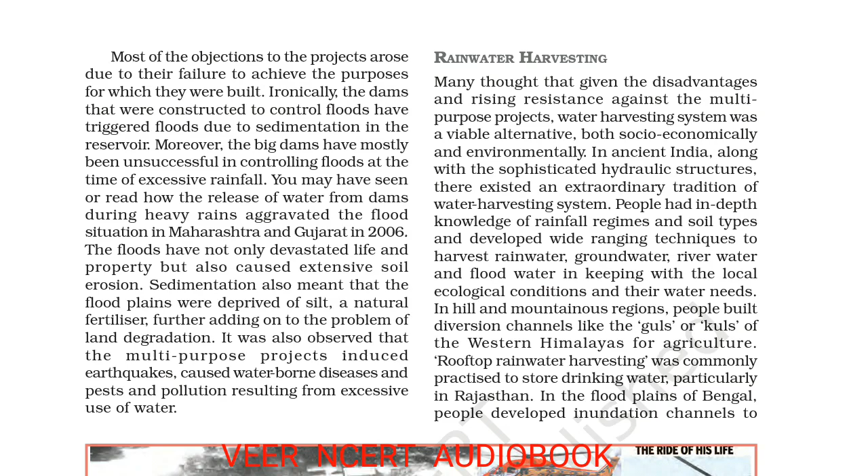Rainwater harvesting. Many thought that given the disadvantages and rising resistance against the multipurpose projects, water harvesting system was a viable alternative, both socio-economically and environmentally.

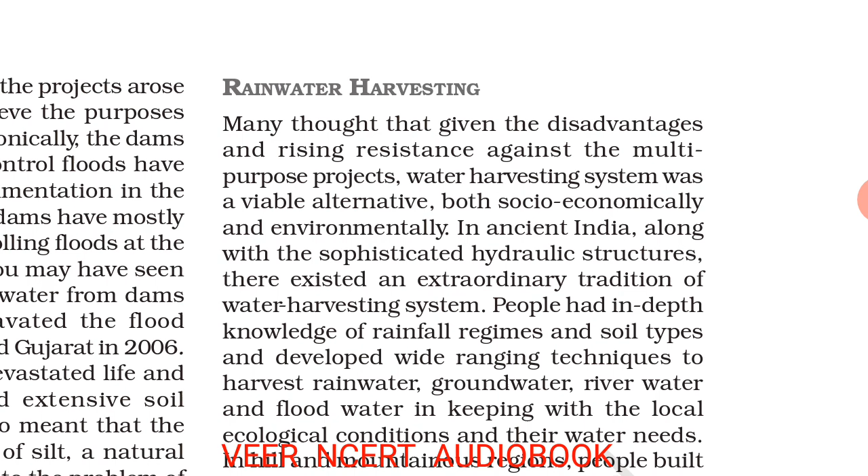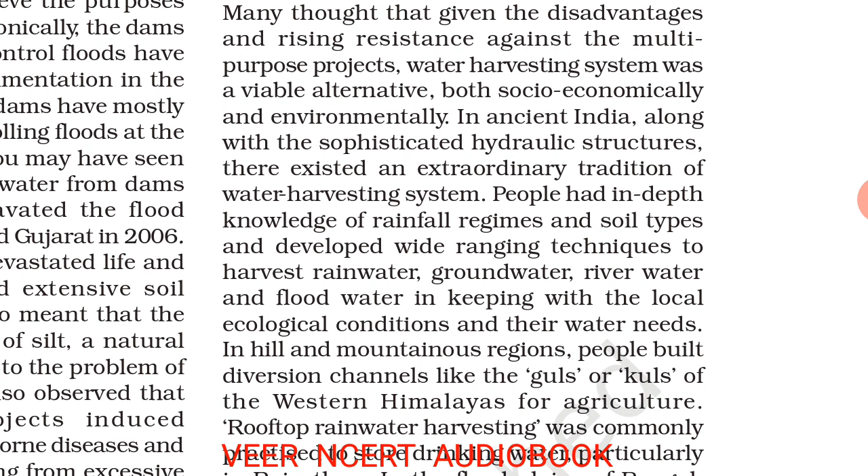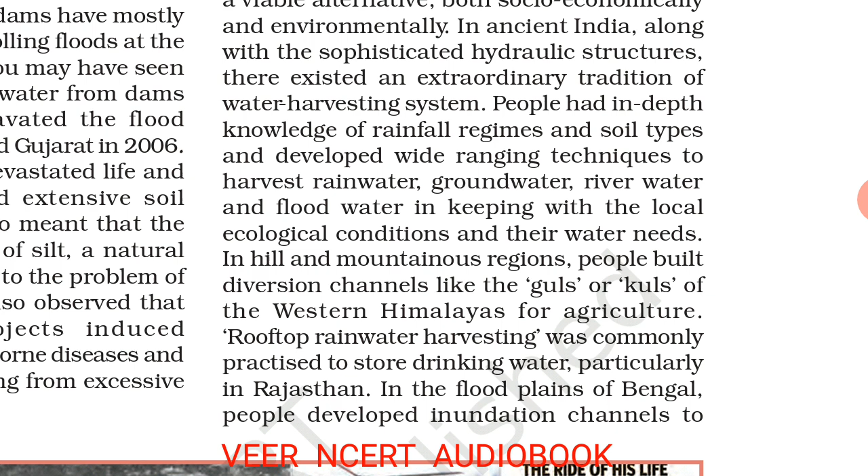In ancient India, along with the sophisticated hydraulic structures, there existed an extraordinary tradition of water harvesting system. People had in-depth knowledge of rainfall regimes and soil types and developed wide-ranging techniques to harvest rainwater, groundwater, river water, and floodwater in keeping with the local ecological conditions and their water needs.

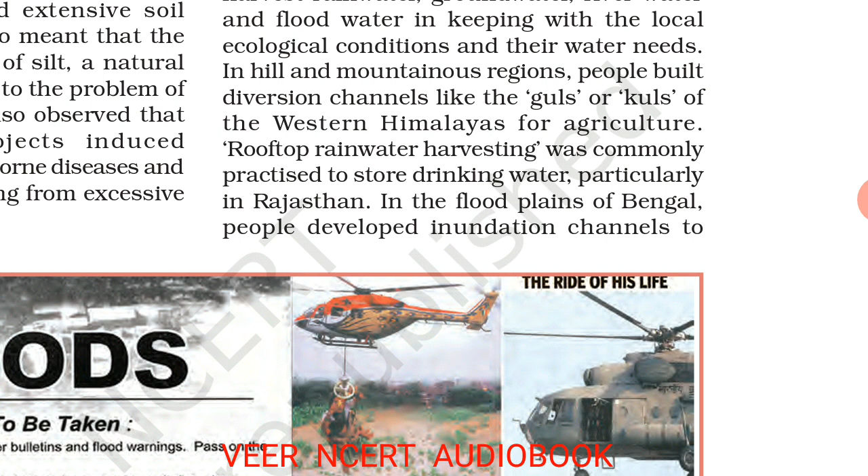In hill and mountainous regions, people built diversion channels like the guls or kuls of the western Himalayas for agriculture. Rooftop rainwater harvesting was commonly practiced to store drinking water, particularly in Rajasthan. In the floodplains of Bengal, people developed inundation channels to irrigate their fields.

In arid and semi-arid regions, agricultural fields were converted into rain-fed storage structures that allowed the waters to stand and moisten the soil, like the khadins in Jaisalmer and johads in other parts of Rajasthan.

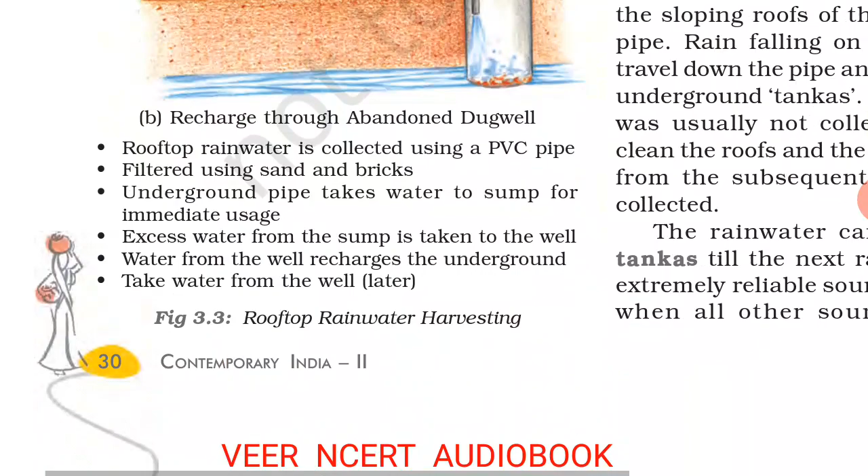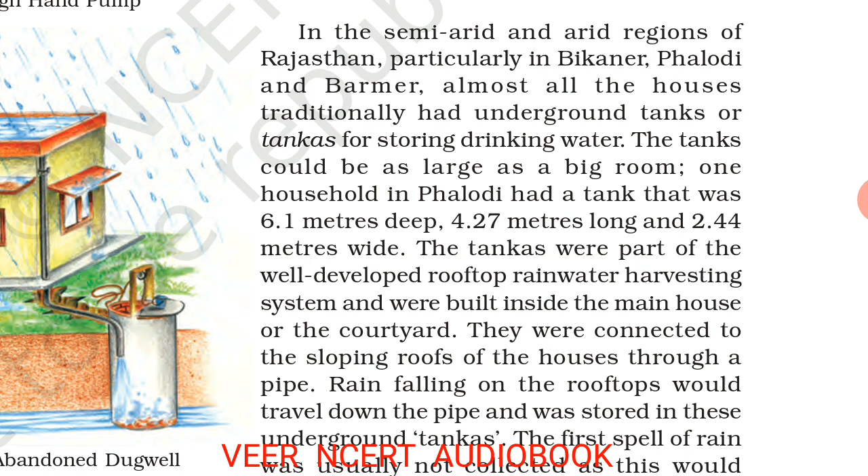In the semi-arid and arid regions of Rajasthan, particularly in Bikaner, Phalodi, and Barmer, almost all the houses traditionally had underground tanks or tankas for storing drinking water. The tanks could be as large as a big room. One household in Phalodi had a tank that was 6.1 meters deep, 4.27 meters long, and 2.44 meters wide.

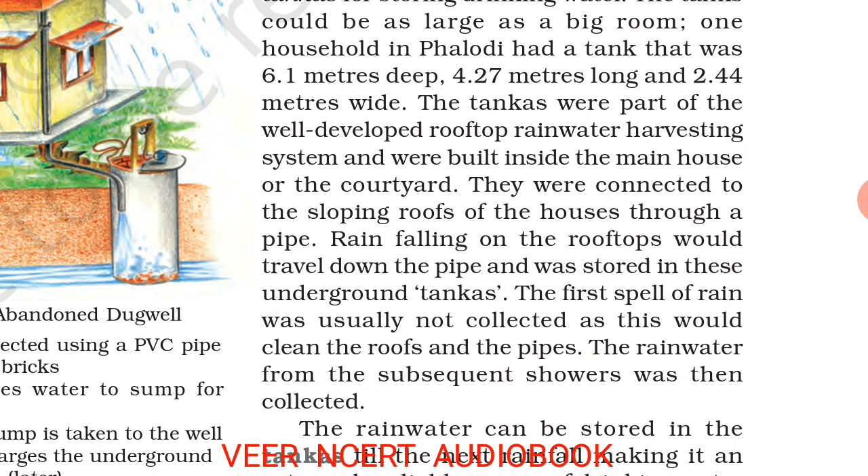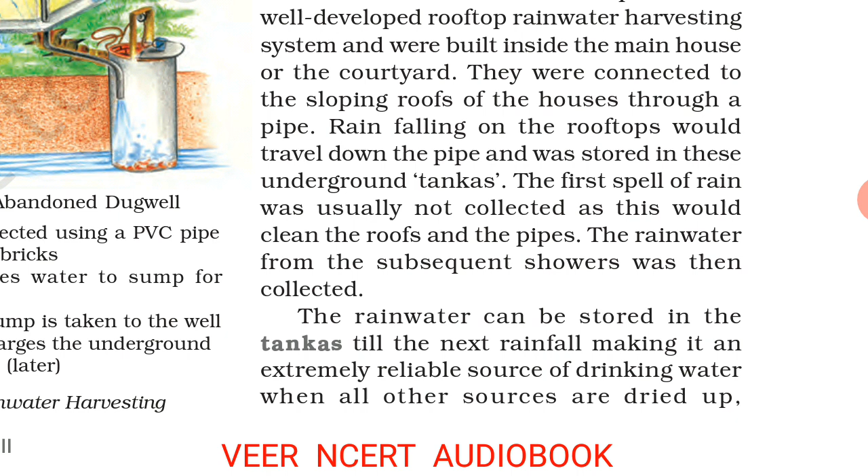The tankas were part of the well developed rooftop rainwater harvesting system and were built inside the main house or the courtyard. They were connected to the sloping roofs of the houses through a pipe. Rain falling on the rooftops would travel down the pipe and was stored in these underground tankas. The first spell of rain was usually not collected as this would clean the roofs and the pipes. The rainwater from the subsequent showers was then collected.

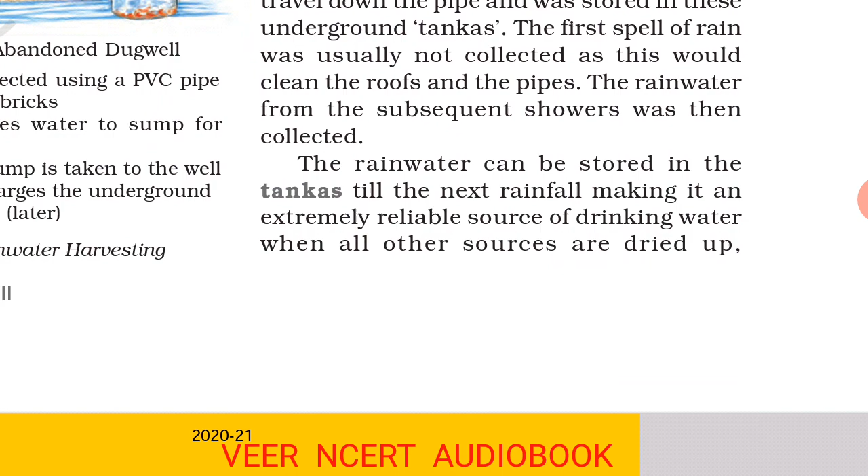The rainwater can be stored in the tankas till the next rainfall, making it an extremely reliable source of drinking water when all other sources are dried up, particularly in the summers. Rainwater or Palar Pani, as commonly referred to in these parts, is considered the purest form of natural water. Many houses constructed underground rooms adjoining the tanka to beat the summer heat as it would keep the room cool.

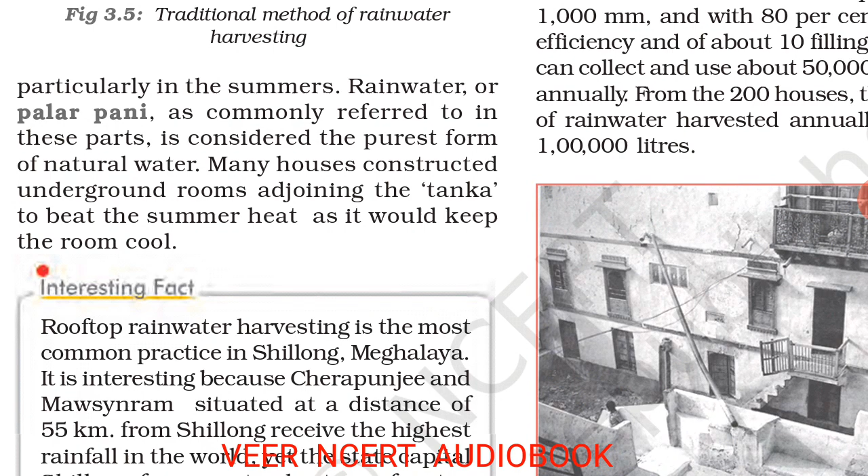Today in western Rajasthan, sadly the practice of rooftop rainwater harvesting is on the decline as plenty of water is available due to the perennial Indira Gandhi Canal, though some houses still maintain the tankas since they do not like the taste of tap water.

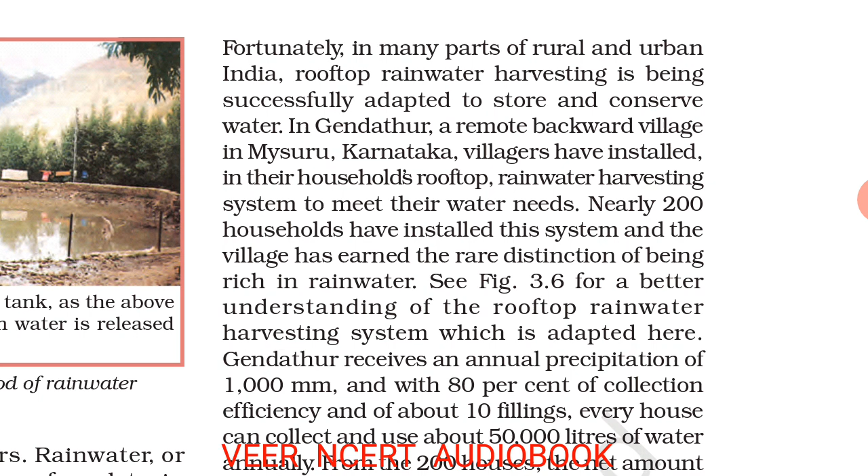Fortunately, in many parts of rural and urban India, rooftop rainwater harvesting is being successfully adapted to store and conserve water. In Gendathur, a remote backward village in Mysuru, Karnataka, villagers have installed in their households rooftop rainwater harvesting system to meet their water needs. Nearly 200 households have installed this system, and the village has earned the rare distinction of being rich in rainwater.

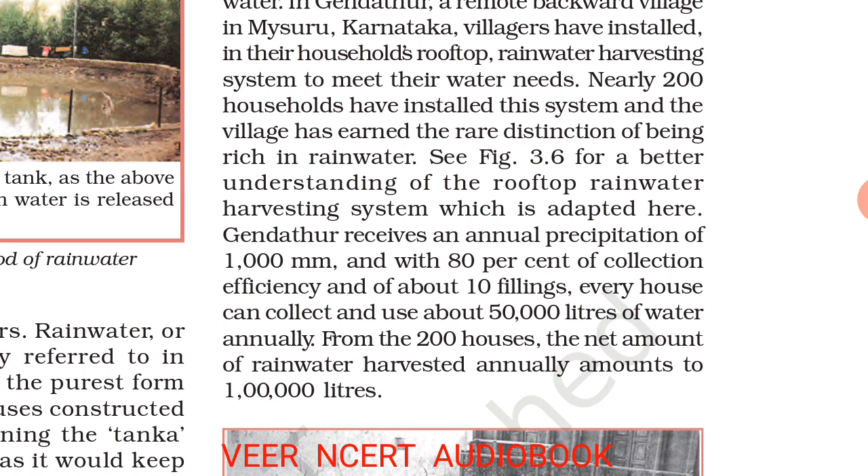See figure 3.6 for a better understanding of the rooftop rainwater harvesting system, which is adapted here. Gendathur receives an annual precipitation of 1000 mm and with 80% of collection efficiency and of about 10 fillings, every house can collect and use about 50,000 liters of water annually. From the 200 houses, the net amount of rainwater harvested annually amounts to 1 lakh liters.

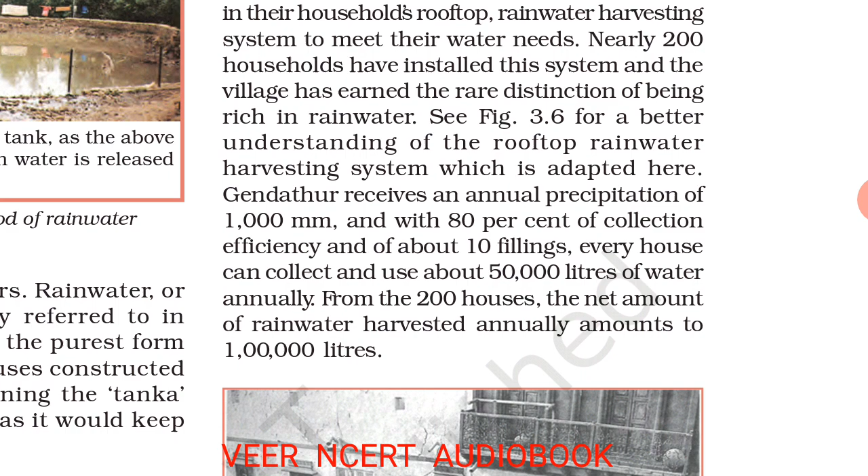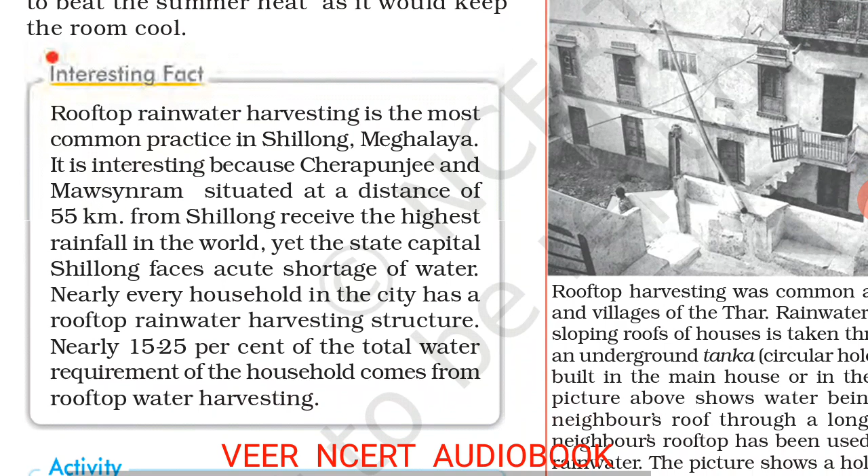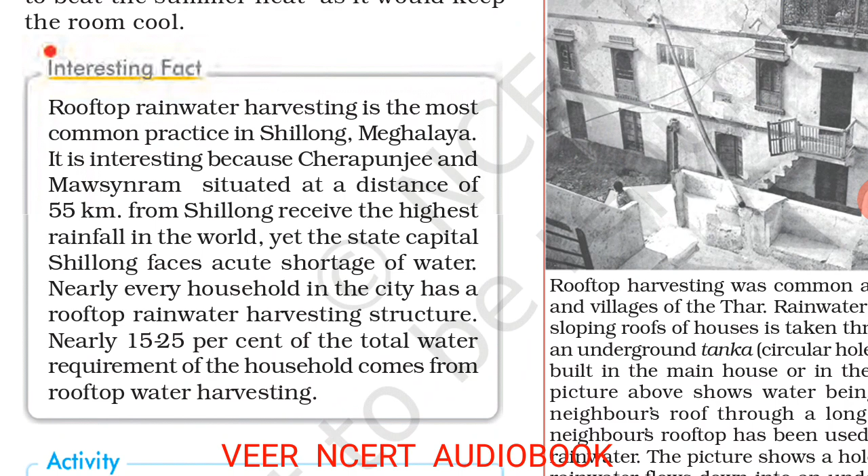Interesting fact: rooftop rainwater harvesting is the most common practice in Shillong, Meghalaya. It is interesting because Cherapunjee and Mawsynram, situated at a distance of 55 km from Shillong, receive the highest rainfall in the world, yet the state capital Shillong faces acute shortage of water. Nearly every household in the city has a rooftop rainwater harvesting structure. Nearly 15 to 25% of the total water requirement of the household comes from rooftop water harvesting.

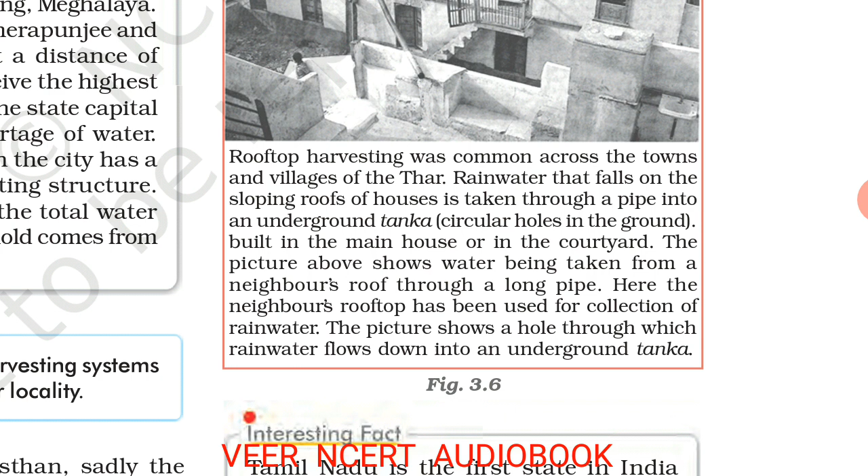Rooftop harvesting was common across the towns and villages of the Thar. Rainwater that falls on the sloping roofs of houses is taken through a pipe into an underground tanka, that is, circular holes in the ground, built in the main house or in the courtyard. The picture above shows water being taken from a neighbor's roof through a long pipe. Here, the neighbor's rooftop has been used for collection of rainwater. The picture shows a hole through which rainwater flows down into an underground tanka.

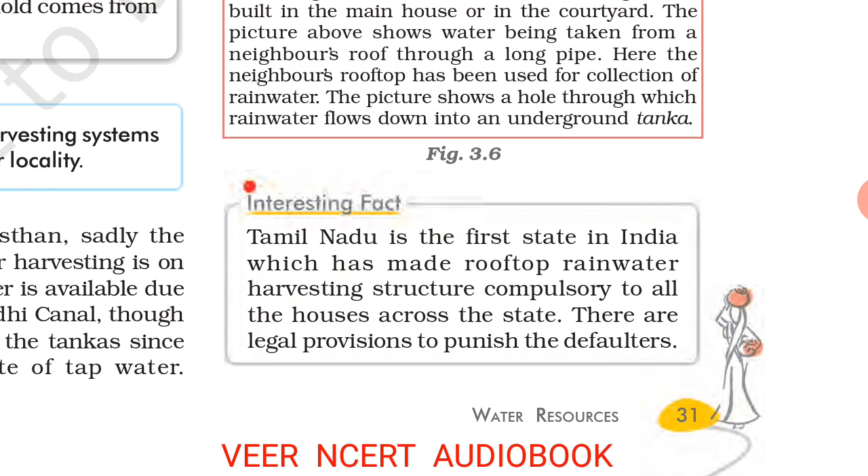Interesting fact: Tamil Nadu is the first state in India which has made rooftop rainwater harvesting structure compulsory to all the houses across the state. There are legal provisions to punish the defaulters.

Bamboo drip irrigation system. In Meghalaya, a 200-year-old system of tapping stream and spring water by using bamboo pipes is prevalent. About 18 to 20 liters of water enters the bamboo pipe system, gets transported over hundreds of meters, and finally reduces to 20 to 80 drops per minute at the site of the plant.

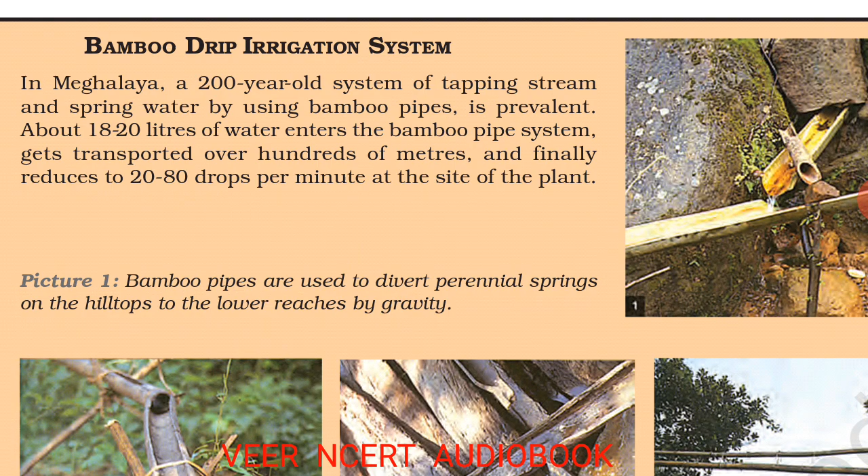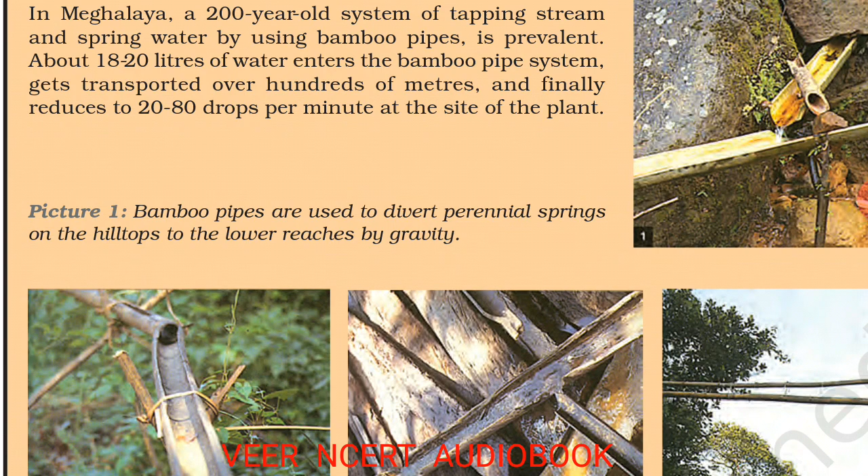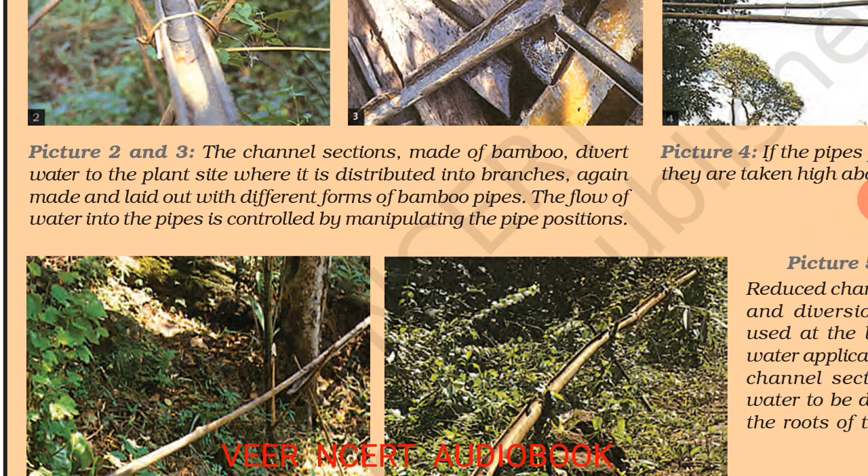Bamboo pipes are used to divert perennial springs on the hilltops to the lower reaches by gravity. The channel sections made of bamboo divert water to the plant site where it is distributed into branches again made and laid out with different forms of bamboo pipes. The flow of water into the pipes is controlled by manipulating the pipe positions.

If the pipes pass a road, they are taken high above the land. Reduced channel sections and diversion units are used at the last stage of water application. The last channel section enables water to be dropped near the roots of the plant.